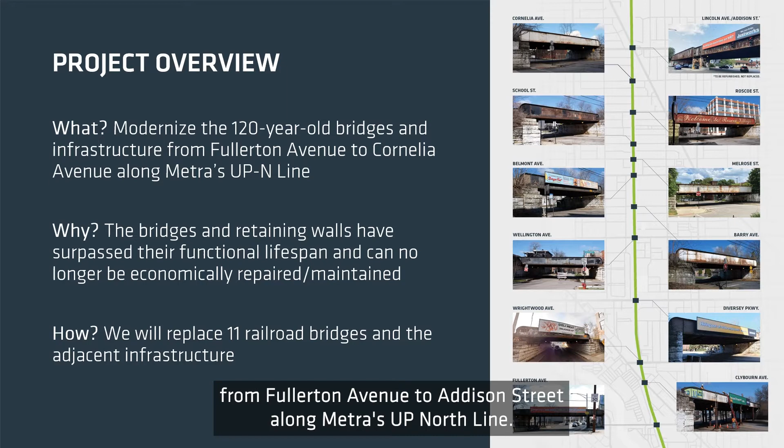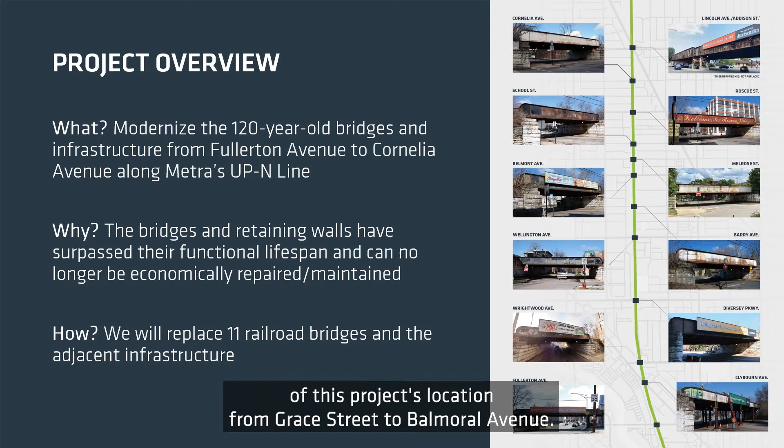The project proposal calls for replacing 11 bridges that have surpassed their functional lifespan and can no longer be economically repaired and maintained. Metra has proactively been addressing future safety concerns to avoid failing infrastructure, and a similar project was recently completed to the north of this project's location, from Grace Street to Balmoral Avenue.

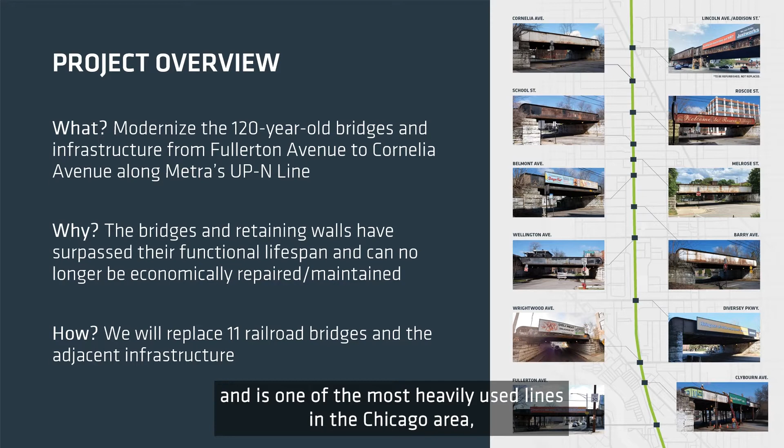It's important to note that the UP North Line provides rail service to passengers between downtown Chicago and Kenosha, Wisconsin, and is one of the most heavily used lines in the Chicago area, with more than 70 weekday trains that, prior to the COVID-19 pandemic, had an average weekday ridership of 34,600. Most of its stations have been in the same general location for more than a century, and this project would secure another century of connectivity for rail passengers and the local community.

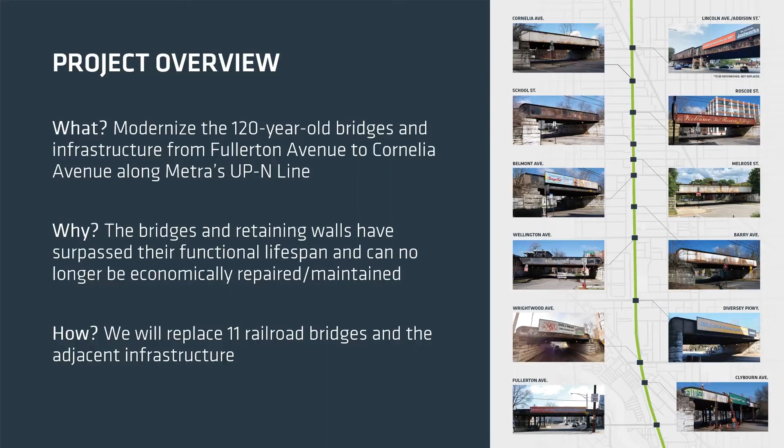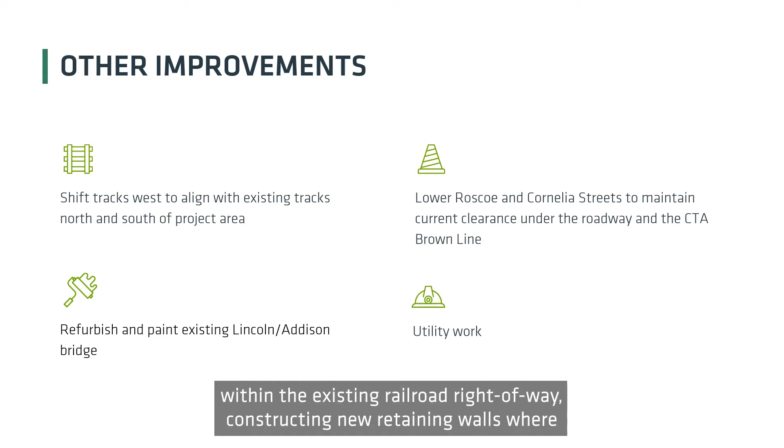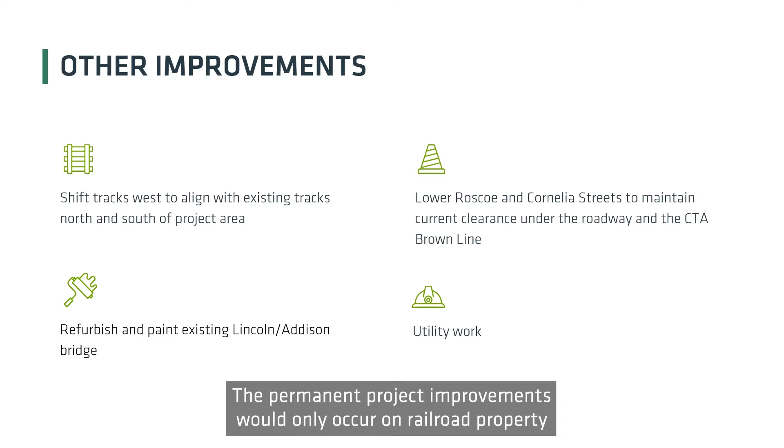In addition to replacing 11 bridges, the proposal includes shifting the tracks approximately 20 feet to the west within the existing railroad right-of-way, constructing new retaining walls where needed, and refurbishing the existing Lincoln Avenue Addison Street Bridge. The permanent project improvements would only occur on railroad property and would not require any permanent use of adjacent property or public land.

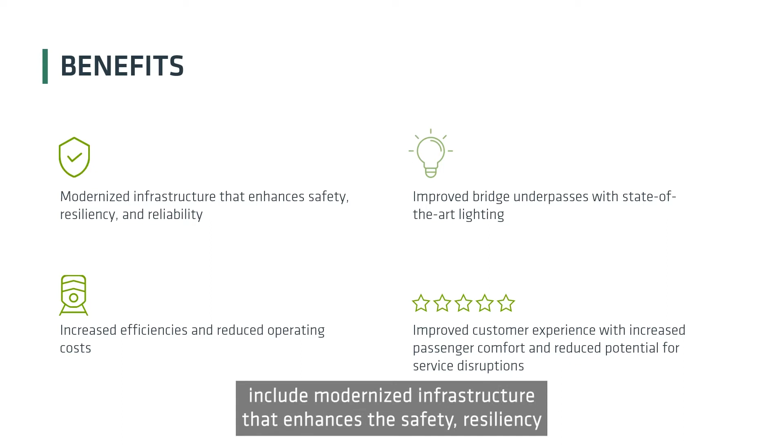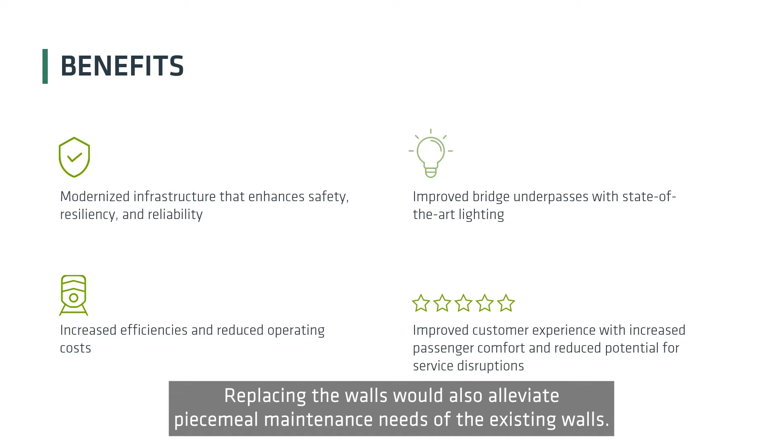Benefits of the project include modernized infrastructure that enhances the safety, resiliency, and reliability of Metra's UP North Line rail service. In the community, each of the bridges to be replaced would have improved bridge underpasses with state-of-the-art lighting, and the currently deteriorating retaining walls would be replaced to support the new railroad infrastructure in keeping with modern engineering guidelines. Replacing the walls would also alleviate piecemeal maintenance needs of the existing walls.

Overall, the project would minimize the need for maintenance, train service delays or disruptions, and work in the community, allowing for increased efficiencies and reduced operating costs.

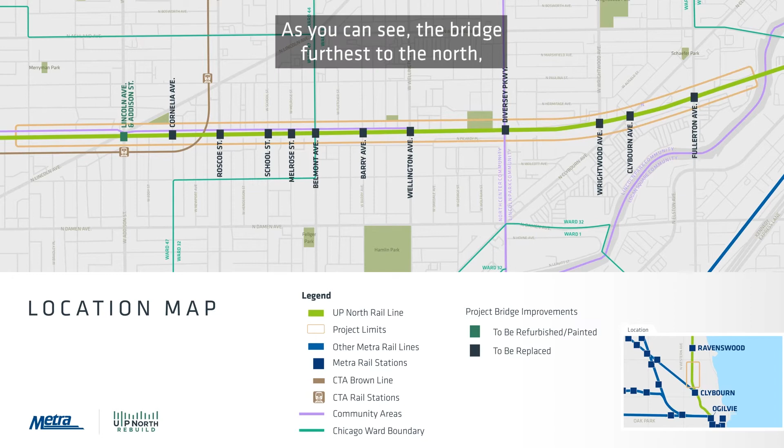For reference, here's a map of the project corridor. The left side of the page is north and the right side is south. As you can see, the bridge furthest to the north, the Lincoln Avenue Addison Street Bridge, would be refurbished, and the 11 bridges south of it would be replaced.

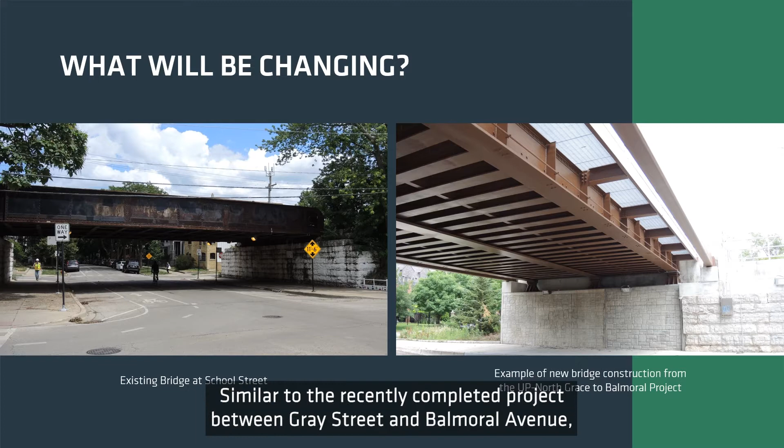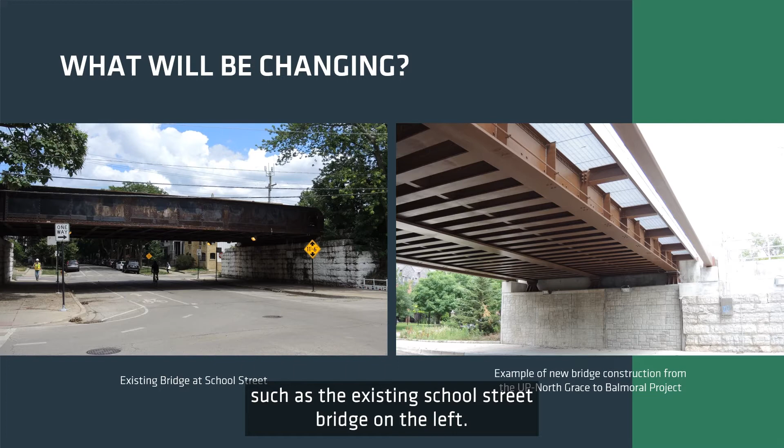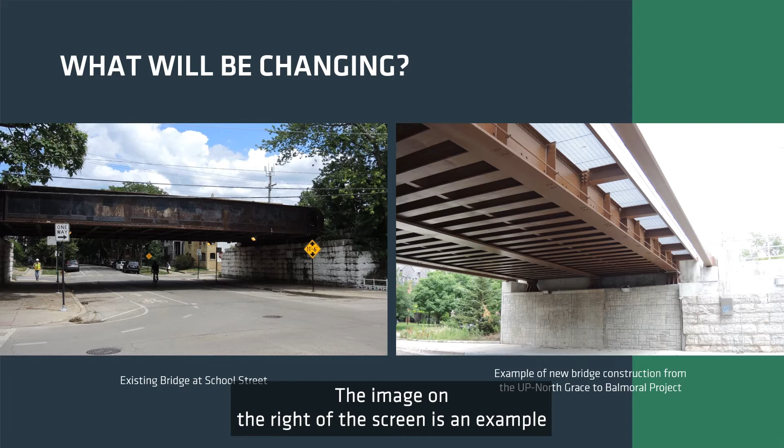So you may be asking yourself, what exactly would the project be changing? Great question. Similar to the recently completed project between Grace Street and Balmoral Avenue, this project would replace rusted, deteriorating bridges, such as the existing School Street Bridge on the left. The project would build new bridges that would support new railroad infrastructure and be in line with modern engineering guidelines. The image on the right of the screen is an example of a new bridge from the Grace Street to Balmoral Avenue project.

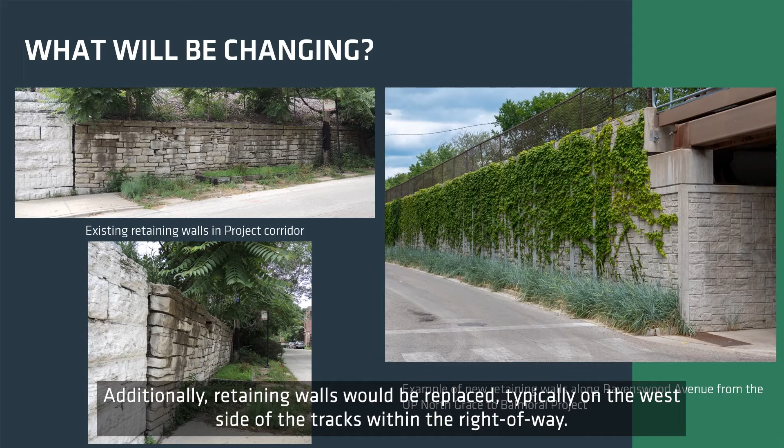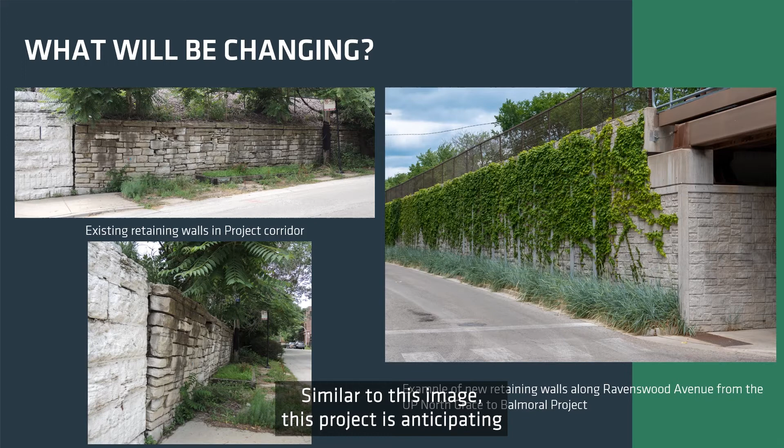Additionally, retaining walls would be replaced, typically on the west side of the tracks within the right-of-way. As you can see in the images on the left of your screen, many of the existing retaining walls need replacement as they are leaning or are beginning to degrade. The image to the right is an example of new retaining walls from the Grace Street to Balmoral Avenue project. Similar to this image, this project is anticipating precast panel retaining walls with climbing vines that would vary in height along the corridor. Please check out our Community Voices station at the open house to provide your input on the retaining wall treatment.

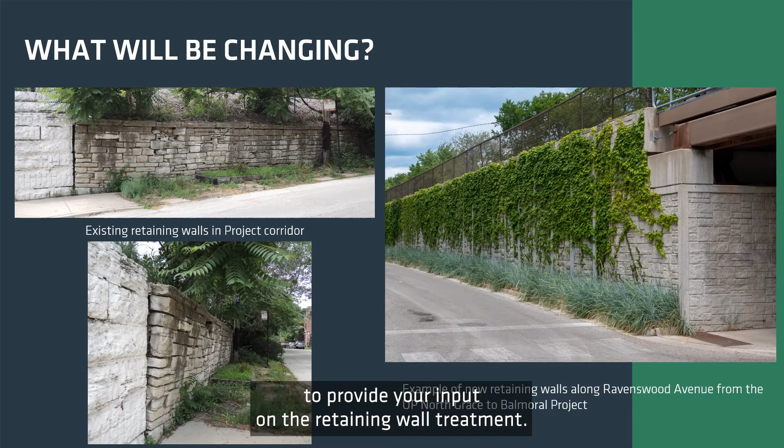So where are we right now in the process of this project? Based on our initial timeline, we are right on track. We are still in the environmental review process required by the National Environmental Policy Act, also known as NEPA, which is anticipated to conclude this year.

We are also still in the design process, which includes detailed civil and structural engineering. Design will take about another year to complete. Construction is anticipated to begin in summer 2023 and continue through 2027.

Metra is committed to updating the community regarding this project, and public outreach efforts like today's open house are an important part of the process. Metra has consistently been in communication with local aldermanic offices, community groups, and residents to inform them of the project and to listen to comments and concerns. An adjacent property liaison has also been helping coordinate communication efforts with residents and the project team.

In late summer 2021, we formally announced the project and began outreach to inform the community about it. This consisted of aldermanic and community group meetings, a project website with details, a press release, local signage, and social media and newspaper announcements. In September 2021, we hosted a virtual public meeting, which you can view on the project website if you missed it. We also posted a frequently asked questions page on the project website.

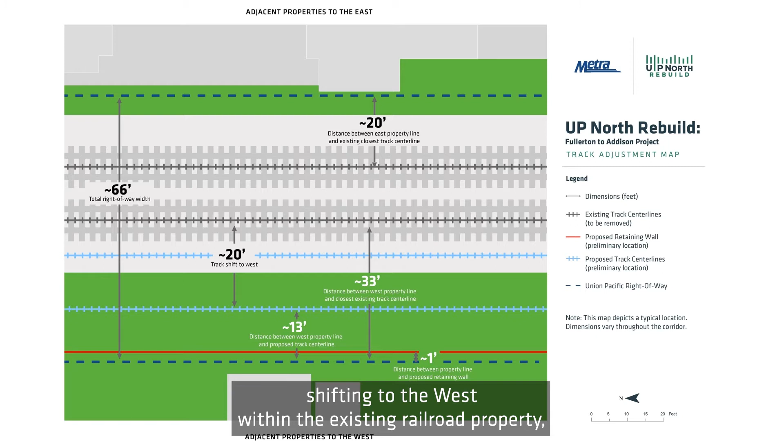As mentioned previously, the tracks would be permanently shifting to the west within the existing railroad property. This map shows the current layout, with 2 tracks offset to the east in the right-of-way, and future dimensions with 2 tracks offset to the west in the right-of-way.

The 2 new tracks would be installed approximately 20 feet to the west of the existing tracks, which would be removed. An additional 3rd track is not being proposed with this project.

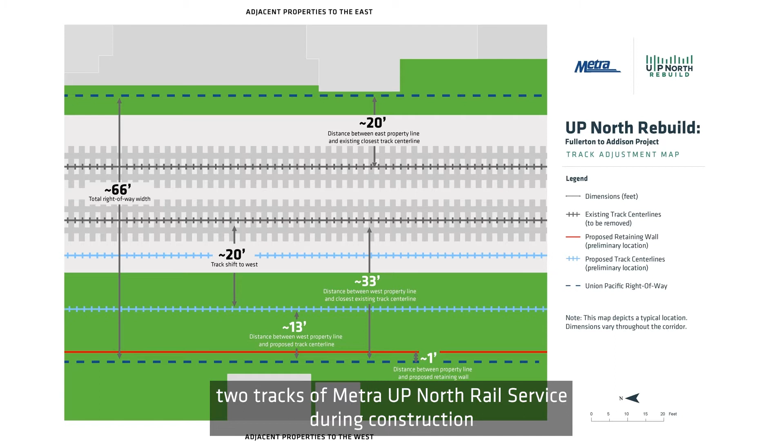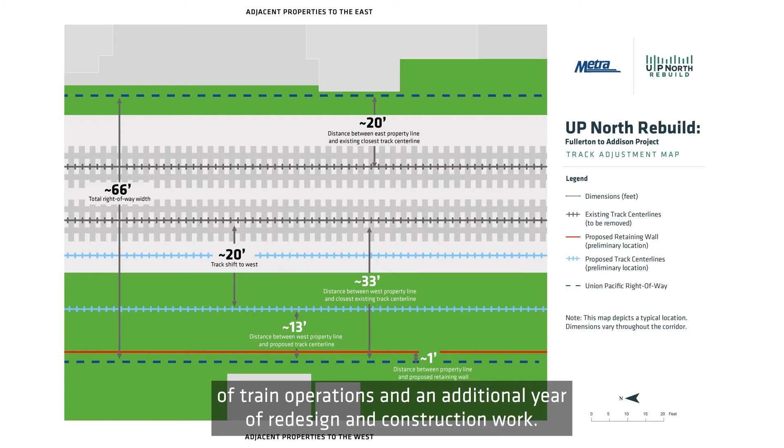The proposed track shift is a result of the need to maintain 2 tracks of Metra UP North rail service during construction. For the recently completed Grace Street to Balmoral Avenue project, a single track service was attempted, but this led to a significant disruption of train operations and an additional year of redesign and construction work. Metra is proactively trying to avoid these types of delays.

To keep 2 tracks open during the work, construction has to be staged in the manner that we will describe in a moment. We are proposing to shift the tracks west because there is more available space to the west, where a 3rd track was removed over 35 years ago, than there is to the east.

As compared to other options considered, this track shift minimizes impacts to the community and avoids the acquisition of property. A similar track shift to the east is not feasible, as it would require a significant expansion of railroad property,

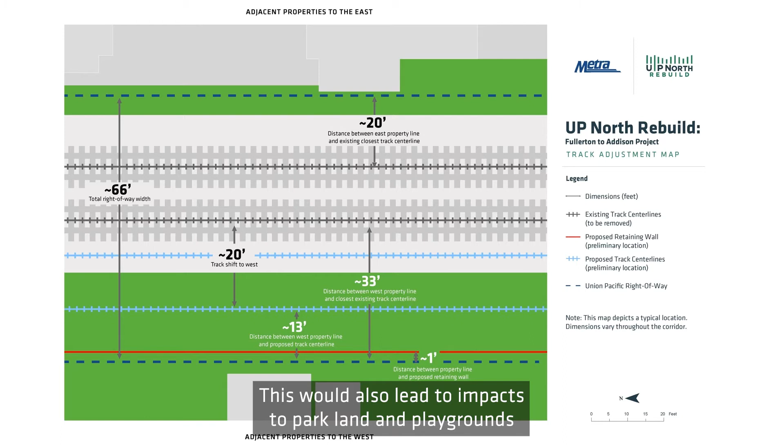leading to impacts to residences and businesses, including multiple large residential complexes. This would also lead to impacts to park land and playgrounds and require the permanent closure of portions of Ravenswood Avenue. Please visit the construction station to learn more about the additional options that were considered for this project.

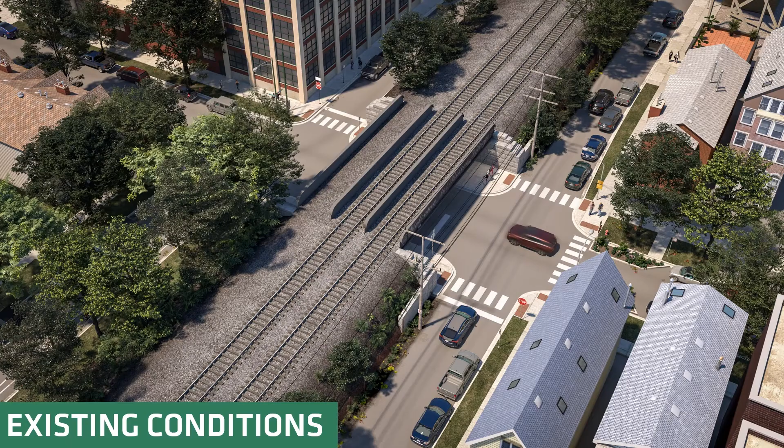The next few slides are conceptual renderings to help illustrate what the construction work consists of and would look like. The overall project would occur in 3 stages and would be completed west to east.

Note that the location and timing for construction is not yet known, and further details would be provided near the start of construction. The image you see on the screen is a rendering of the existing conditions at Roscoe Street, with the 2 tracks offset to the east.

As you can see, there is additional space available on the west side of the tracks for new tracks and construction work, where a 3rd track used to exist and the 3rd track bridge bays still do.

Stage 1 of construction would consist of demolition of the unused 3rd bridge bays west of the current tracks. Please note that vegetation removal within railroad property would be needed to accommodate the track shift and retaining walls.

Limited vegetation removal within the public way and private property would be needed at the property border. Removal would be minimized to the extent feasible on public and private property.

Also, note the new retaining walls that would be built during this stage. Fencing on retaining walls is a requirement for railroad worker safety and to deter trespassing. UP North trains would operate on the current tracks during this phase.

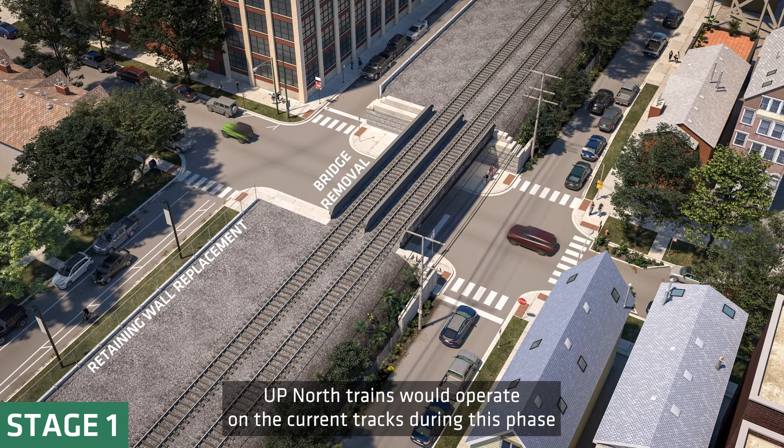Stage 2 would consist of construction of the new bridges and tracks for northbound trains, which would be west of the current tracks. When those bridges and tracks are done, UP North trains would use the new track to the west and the old track to the east for service, while the middle bridge bays and tracks are demolished.

Stage 3 would consist of construction of the new bridges and tracks for the southbound trains between the new track to the west and the old track to the east.

When those are done, UP North trains would use the 2 new tracks, and the remaining old bridge bays and tracks to the east would be demolished. It would also consist of construction of retaining walls on the east side of the railroad property where required.

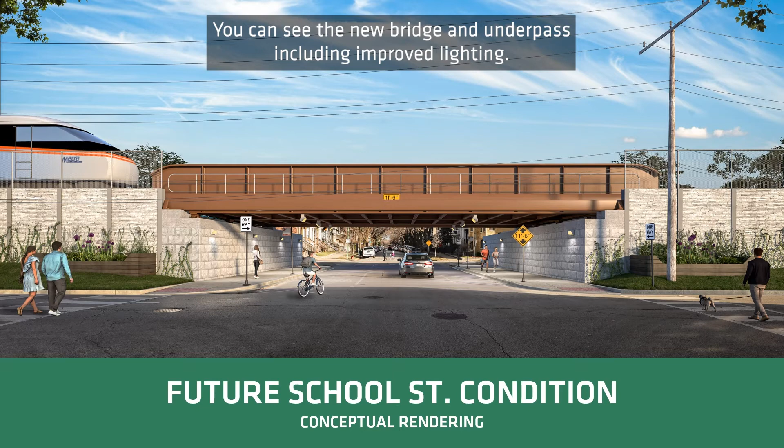This next slide shows the conceptual rendering of what the new School Street Bridge would look like. You can see the new bridge and underpass, including improved lighting. In front of the new retaining walls, there would be available space for new landscaping or other vegetation within the public way.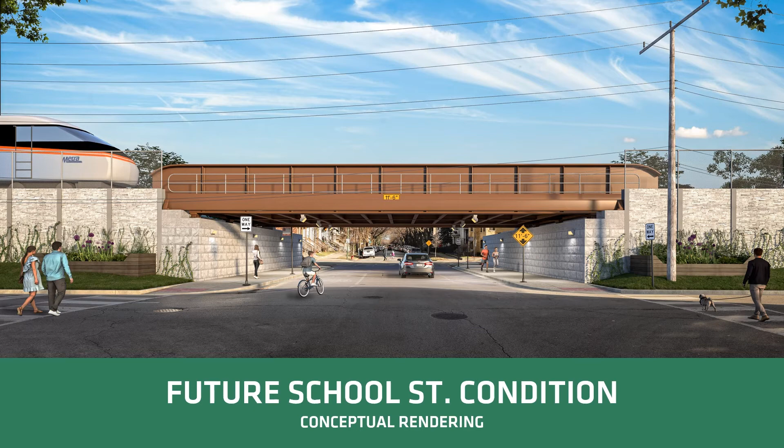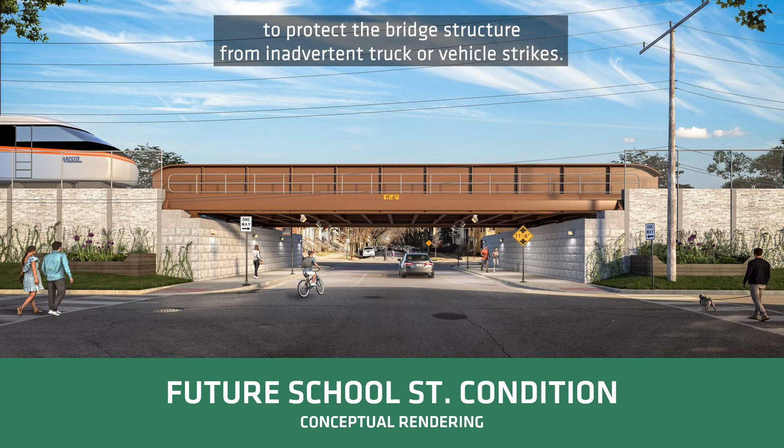Please visit our Community Voices station to provide input regarding what you would like to see for vegetation within the public way. It's important to note that the bridge clearance for vehicles would remain the same, and a sacrificial beam would be installed to protect the bridge structure from inadvertent truck or vehicle strikes. Also, current railroad standards require a walkway and other safety measures for workers on the bridges.

As previously mentioned, construction work would primarily take place within railroad property. Staging or placement of construction equipment on private property would not be necessary. However, in some locations, temporary construction easements would be required to allow workers access to complete excavation, to install retaining walls and fencing, and to collect construction debris.

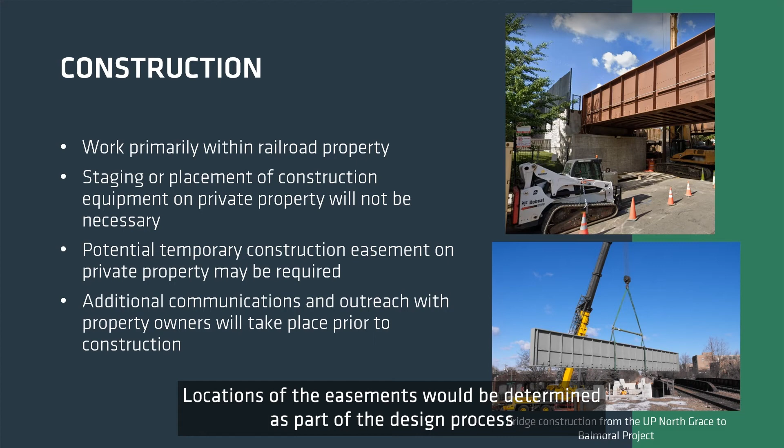Note that temporary construction easements are legal agreements with property owners that grant access to private properties for construction activities over a limited period of time. Locations of the easements would be determined as part of the design process and would be agreed upon and coordinated with property owners prior to construction.

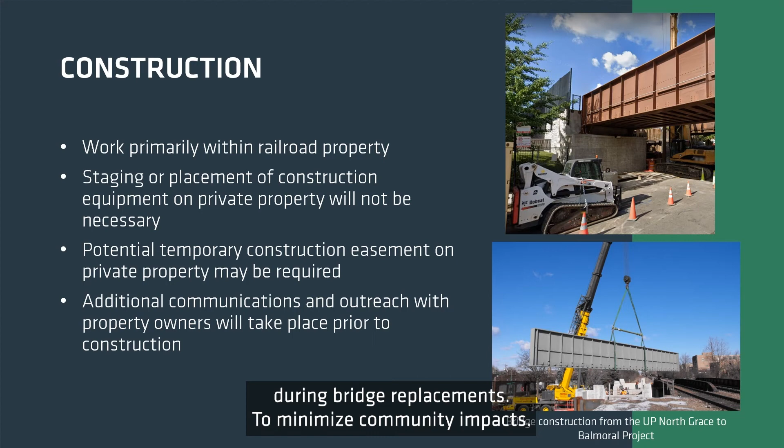Additionally, some traffic modifications and detours for vehicles, bikes, and pedestrians would be needed during bridge replacements. To minimize community impacts, Metra plans to notify the public of upcoming work and closures, maintain traffic circulation with clearly marked detours and roadway modifications, and maintain sidewalk access on at least one side of the roadway where practicable.

Furthermore, we will be hosting a third public meeting prior to construction to provide more details as it relates to construction schedules and locations, as well as providing construction notifications during construction.

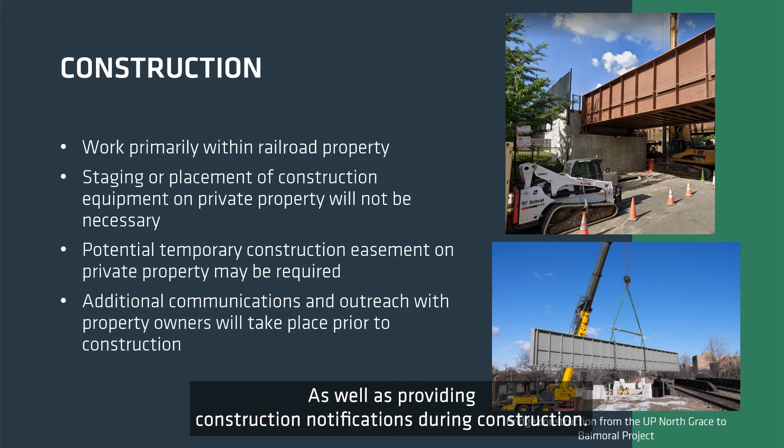As part of this project, the tracks would be shifting west approximately 20 feet. We understand that some property owners are currently utilizing railroad property, some unbeknownst to them. Items on railroad property would need to be removed before construction, which is anticipated to begin in 2023, giving property owners time to move and adjust items accordingly.

If you are a property owner with a lease agreement with Union Pacific, or if you are unclear about the location of the railroad property line, please connect with our adjacent property liaison, Melody Carvajal, who is on site at the open house. You can also email her at carvajalma@cdmsmith.com.

Lastly, as it is a concern of the community, we want to ensure we are providing the most up-to-date information regarding tree and vegetation changes. Tree and vegetation removal within railroad property would be needed and may be required directly adjacent to railroad property depending on the planting or tree proximity for safety reasons and to accommodate the track shift proposed for this project.

For private property vegetation, removal would be minimized but may be needed near the property line. Temporary easement agreements would address these areas, and best practices would be used to avoid incidental impacts. In the public way, we would minimize vegetation removal where feasible.